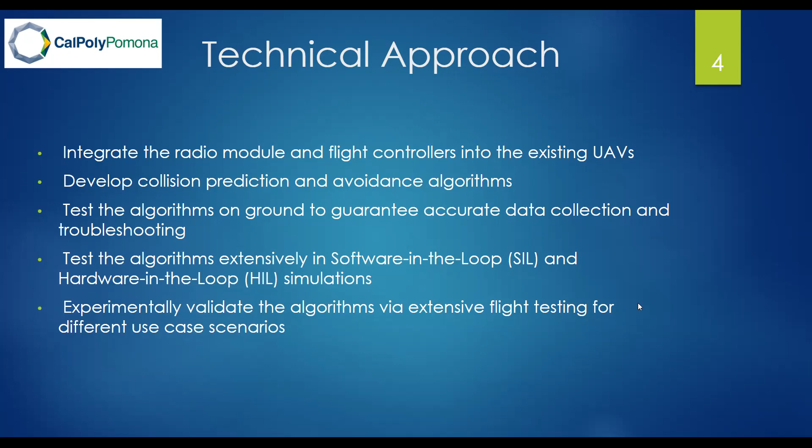This is followed by ground testing in order to ensure accurate data collection and, of course, facilitate troubleshooting. Finally, we experimentally validate our algorithms via extensive flight testing in different use case scenarios. Due to the limits placed on ADS-B out functionality, our team surveyed a number of ADS-B-like solutions. The XBee radio module was the preferred solution, as it is lightweight, reliable, and has a low power consumption, all characteristics desirable for small unmanned vehicles.

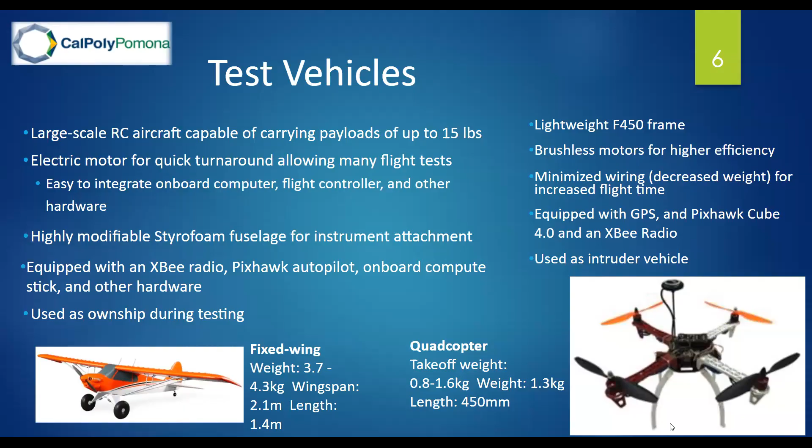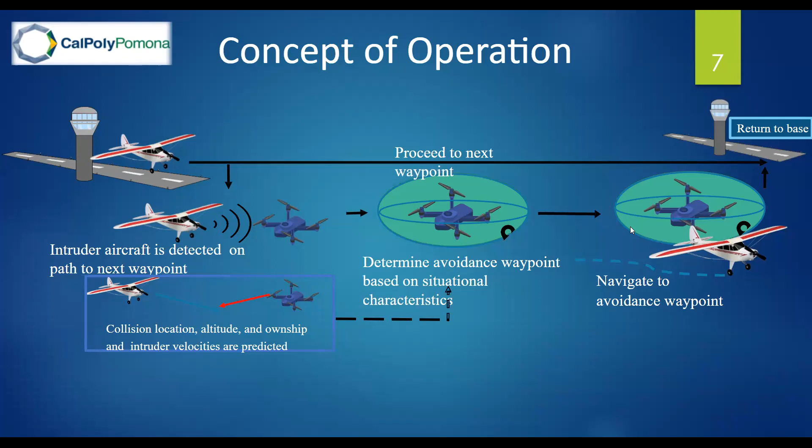Here we have our concept of operations. Our fixed-wing aircraft begins the mission by taking flight, then proceeds to a waypoint mission. During the flight, our collision prediction algorithm predicts possible collision locations, altitudes, and velocities between both fixed-wing and intruder aircraft. Once a collision is predicted, we generate an avoidance waypoint based on situational characteristics. Then we proceed to maneuver to said waypoint. After we navigate to this waypoint, we then return to the navigation mission.

Our procedure for collision avoidance is as follows. First, our function collision predicted compare detects possible collisions by comparing the future path of both vehicles. Then, we calculate an avoidance waypoint using the own ship and intruder X and Y positions. We then proceed towards the avoidance waypoint. Following this, we resume the mission after about 5 seconds.

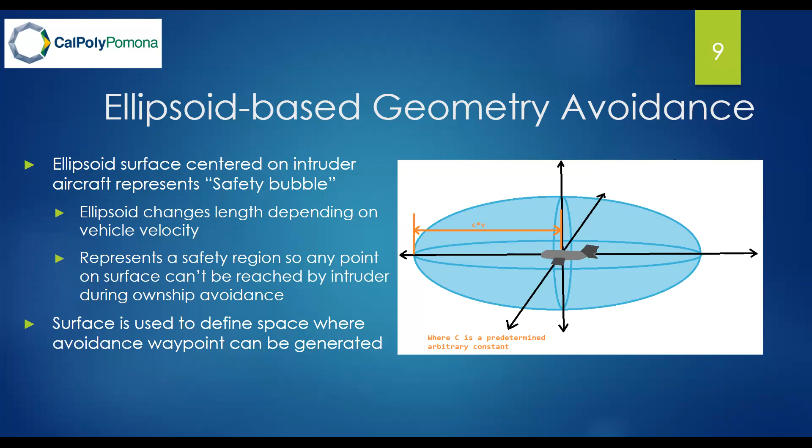For our collision avoidance algorithm, we generate an ellipsoid surface centered on the intruder aircraft. This represents a safety region, so any point on the surface can't be reached by the intruder during own ship avoidance maneuvers. This surface is used to define the space where avoidance waypoints can be generated. Following the generation of the ellipsoid, we proceed to take a horizontal slice of the ellipsoid, corresponding to the desired energy state of the vehicle post-maneuver. We then generate 2 tangents to this elliptical slice, as well as 2 corresponding avoidance waypoints. We then select the closer point as our target avoidance waypoint.

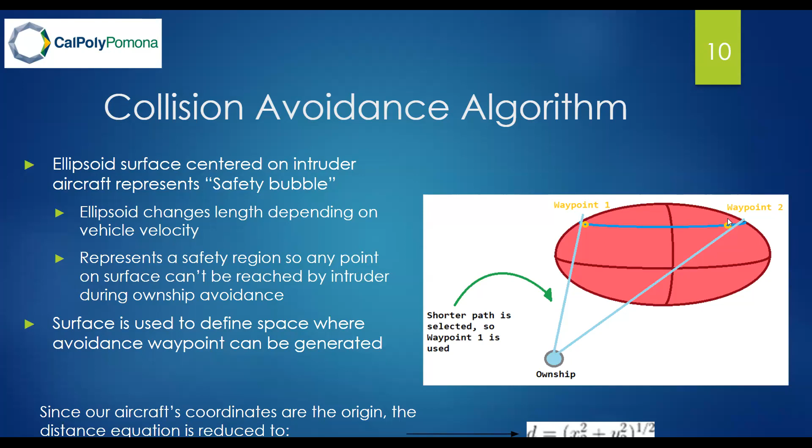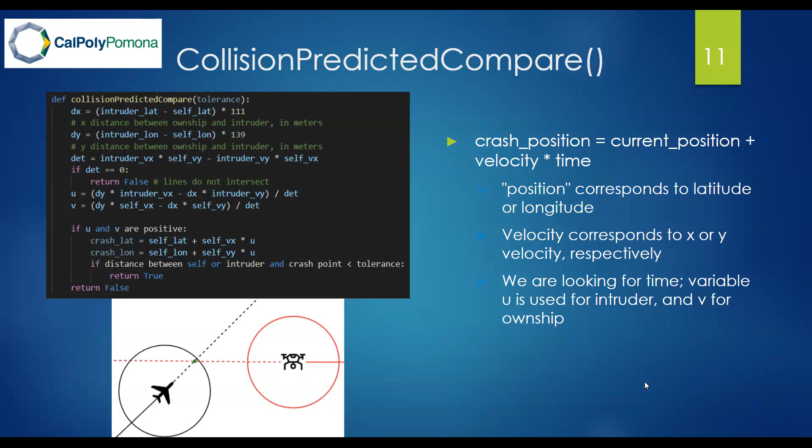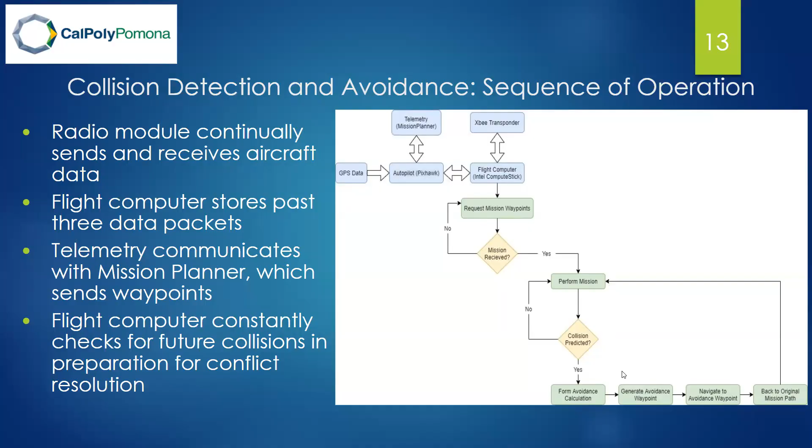Here is our sequence of operations. Our radio module continually sends and receives aircraft data, and our flight computer stores the past three data packets. Our telemetry communicates with Mission Planner, which sends waypoints. Finally, our flight computer constantly checks for future collisions in preparation for conflict resolution. Our conflict resolution functionality is described by the previous slides.

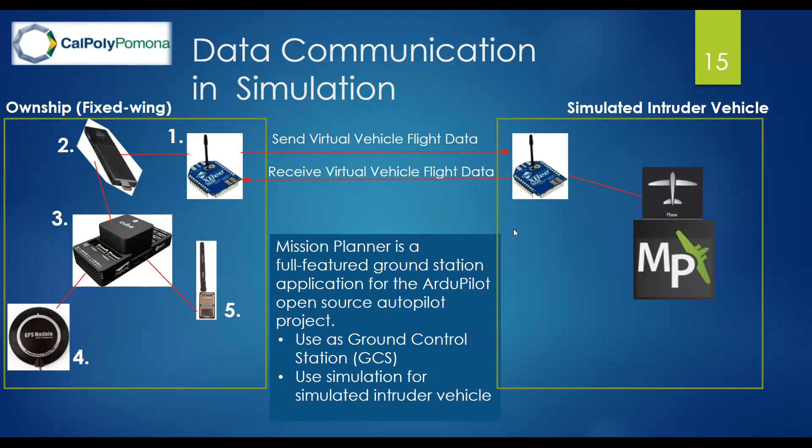Here we show the communication between various components, including the communication between ground control station and the vehicles. The onboard computer processes the collision avoidance algorithm and intruder's flight data, such as the geographic coordinate and the velocities, and makes decisions and sends avoidance commands as MAVLink messages to the Pixhawk autopilot. The autopilot then commands the own ship to perform the specified collision avoidance maneuver.

The onboard computer reads the GPS position of the controlled aircraft directly from the Pixhawk through message packets using MAVLink protocol. The GPS locations of the intruder aircraft are received by the XBee radio module and sent to the Pixhawk autopilot, which then sends the data to the companion computer.

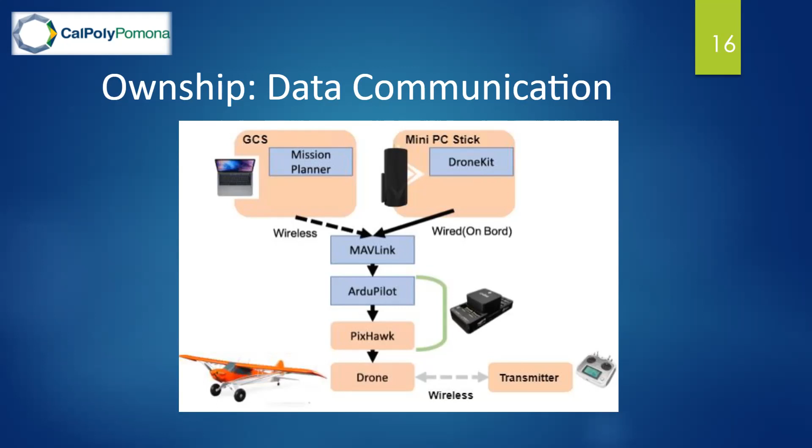After location data from both of the vehicles is stored, the companion computer starts calculating for a change of course maneuver using kinematic equations and a probability of collision. Once a collision is predicted, an avoidance maneuver is requested. The new avoidance waypoint will be calculated and sent to the Pixhawk autopilot, which maneuvers the aircraft to a collision-free path.

ArduPilot Mission Planner includes software-in-the-loop simulation. This helps validate and debug the algorithm and simulation without using any hardware, so that any potential mishaps during flight testing can be avoided. The ability of the algorithm to add a waypoint that the own ship needs to travel to after performing collision avoidance maneuvers was tested in the simulation.

The specific tasks that were tested in the simulation are: 1. Testing adding a collision avoidance waypoint into the mission list. 2. Testing sending new mission commands to the vehicle. 3. Testing vehicle navigation to the avoidance waypoint. And 4. Testing resumption of the mission by the vehicle after avoidance.

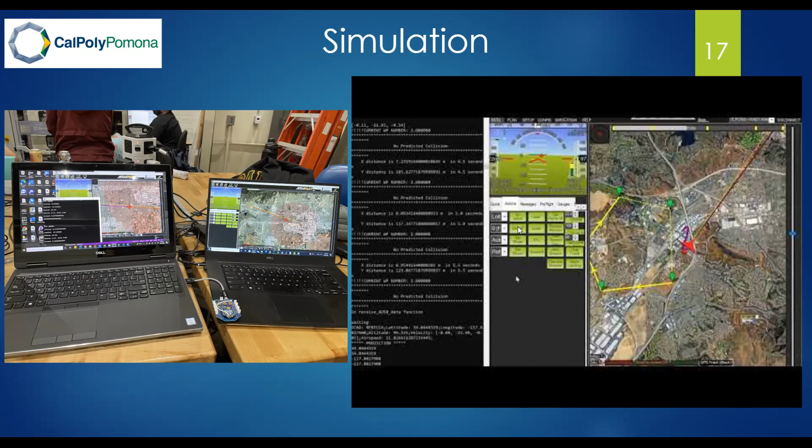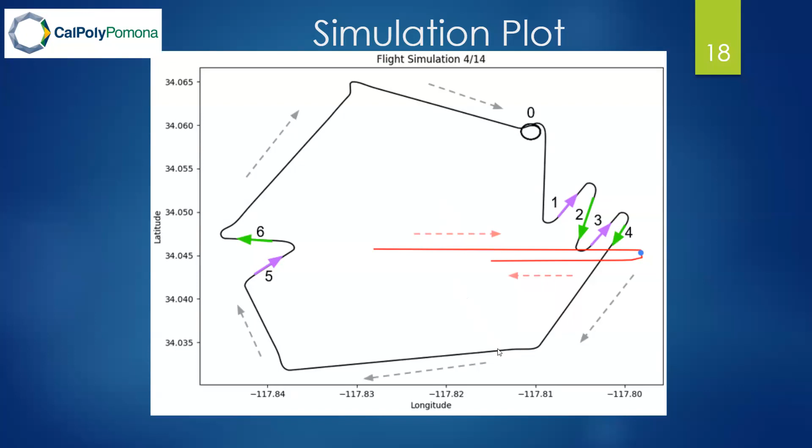Here, we can see the results of the simulation. The black line represents the own ship trajectory, and the red line represents the intruder trajectory. The dashed lines indicate the headings of the two vehicles. Prior to point 1 and at point 2, predictions did indicate that a collision would occur, and appropriate collision avoidance maneuvers were undertaken, as seen at point 1 and at point 3. Following the maneuvers seen at point 3, the vehicle no longer predicted a collision and returned to the waypoint mission, as seen at point 4.

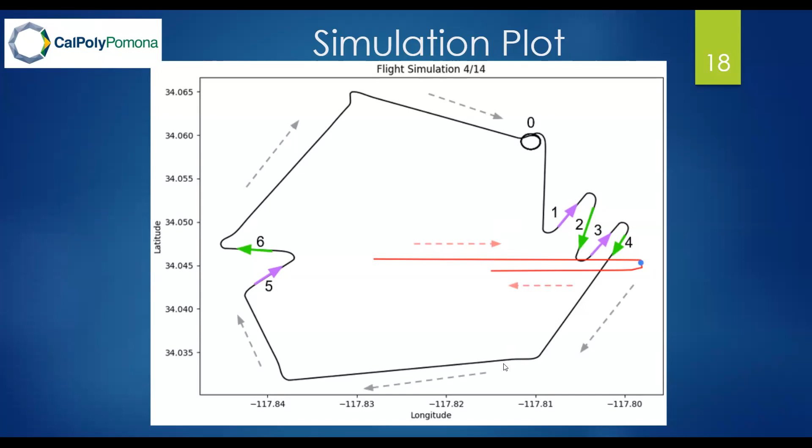The same tasks, tasks 1 to 4, were tested in the flight test. During the flight test, the operation is slightly different. The pilot manually took off the own ship, and once airborne, the vehicle was switched to autopilot mode. Here, it can be seen that the own ship heads to waypoint 1 as the vehicle is set to auto mode. Although it seems like the own ship collides with an intruder between waypoint 2 to waypoint 3, the trajectory overlap happens in different time frames. The own ship and intruder's current positions are marked as blue dots in their trajectories.

It was expected that the avoidance waypoint would be triggered and an avoidance waypoint would be generated for the own ship to navigate to. However, the avoidance waypoint was not generated and caused the own ship to loiter at the point of the own ship's current position. After the collision was cleared, the own ship resumed its mission and returned home. As such, tasks 1 and 4 were successfully completed, but tasks 2 and 3 failed.

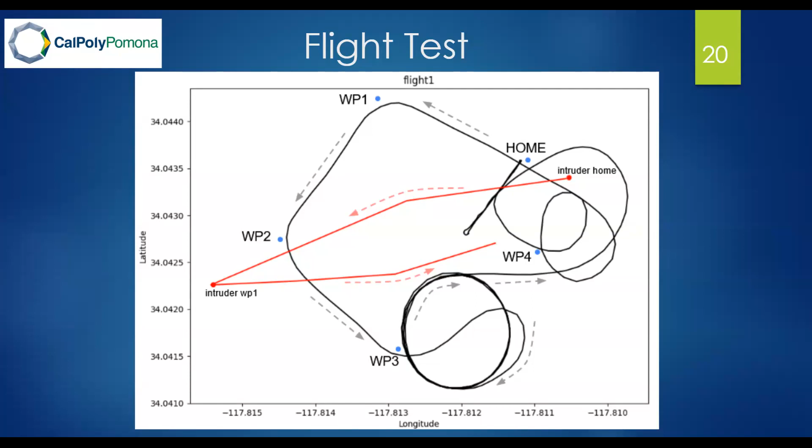The collision prediction algorithm and resumption of the mission worked as expected in flight, but the collision avoidance algorithm did not. The failure to generate a valid avoidance waypoint in the flight test is under investigation and will be reported on in the future. This is likely due to an issue with the implementation of the algorithm and its communication with the Pixhawk autopilot during flight tests.

In conclusion, the proposed algorithm presents a low-complexity algorithm for the collision detection and avoidance for a fixed-wing UAV equipped with an ADS-B transceiver or a custom ADS-B-like solution. The collision prediction method approximates the future position of the nearest intruder aircraft and the own ship to a high degree of precision, ensuring that any likely collisions are predicted. This makes it a viable solution for implementation into high traffic density airspaces, where the management of aircraft velocity and altitude is critical, and avoidance maneuvers must be generated rapidly in order to deal with the dynamic environment.

In our simulations, our prediction algorithm is able to predict collisions as planned, and our avoidance algorithm generates appropriate avoidance waypoints. However, during our flight test, while our prediction algorithm is successful in predicting collisions, the airplane does not proceed to generate waypoints and loiters instead, suggesting an issue in the way our waypoints are given to the autopilot.

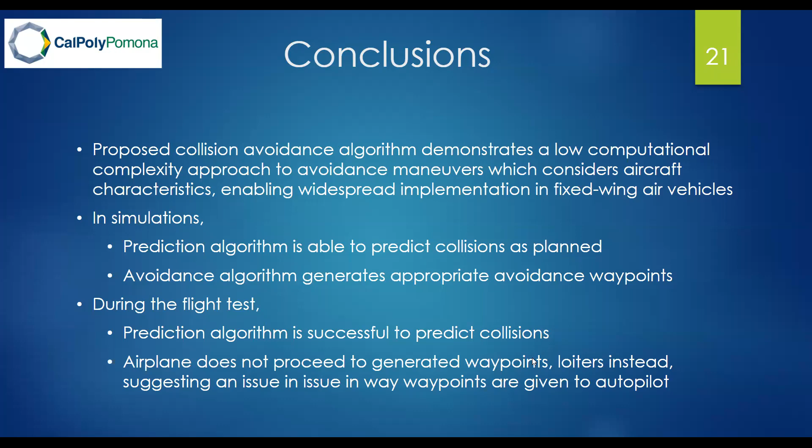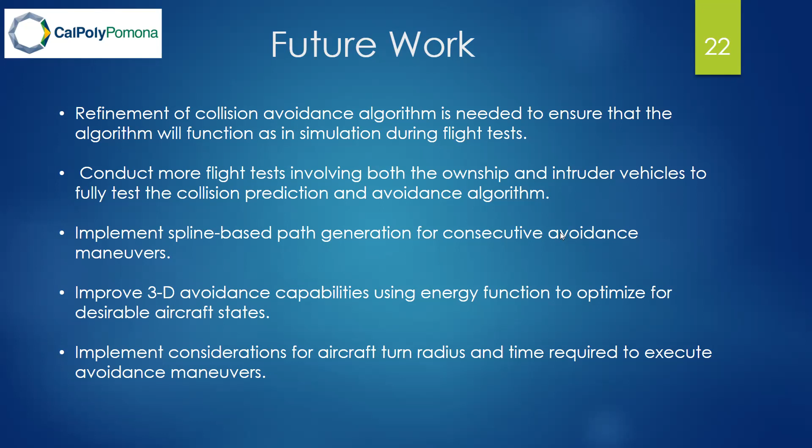For our future work, we aim to further refine our collision avoidance algorithm, such that our algorithm functions as it does during simulation. Furthermore, we will need to conduct more flight tests involving both the own ship and intruder vehicles to fully test the collision prediction and avoidance algorithms. In the future, we also aim to implement spline-based path generation for consecutive avoidance maneuvers, as well as improving our 3D avoidance capabilities using our energy function to optimize for desirable aircraft states. Finally, we also aim to eventually implement considerations for aircraft turn radius and time required to execute avoidance maneuvers.